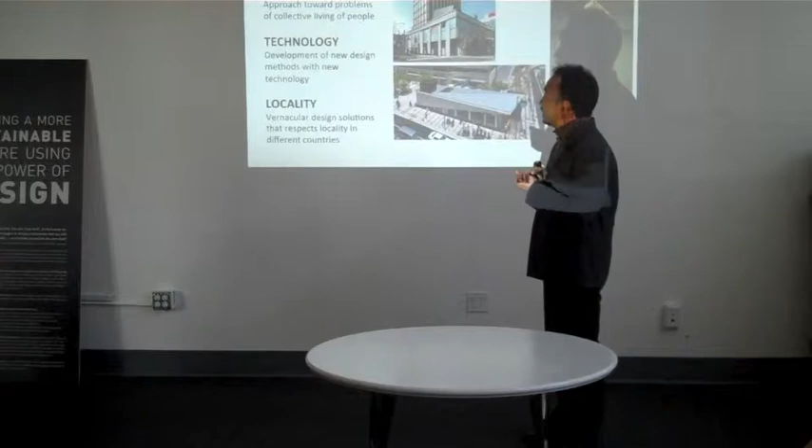So just start. We, KMDW, actually today is the 10th anniversary of KMDW. Happy birthday! Wow, 10 years, yes.

Then we get several projects from developers and private sectors or some public sectors, and some urban projects like this in Kobe. And here, a part of a redevelopment project in Tokyo, working with SOM New York. And here is a mountain house in Hakone, a private mountain house.

And this is our idea to use LVL and plywood to build a 14-story residential tower in Japan. To do so, we need some non-flammable wood technology. And we worked with some engineers to develop that technology. And then we got the 2-hour fire rated permission from the government. So basically, technically we can build this. But we are trying to find a sponsor at this moment.

Then this is the Tokyo Midtown project designed by SOM New York, which was completed in 2007. So we are representing SOM now in Tokyo, in Japan, and we are doing some other projects with them. Unfortunately, we started to work with SOM San Francisco here, but the project stopped. That's why we missed the chance. But we are still pursuing the chance, working with SOM in San Francisco. And some other projects are happening in Beijing, and this one is Tokyo, but a Hong Kong-based developer.

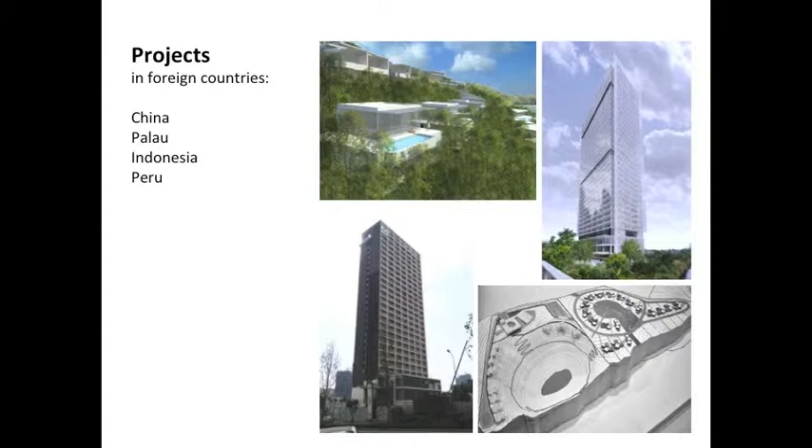So we try to collaborate with several companies or sectors or organizations internationally. That's our purpose. So we try to expand and also introduce many companies and people from all over the world. And these days we are involved in some projects in Peru. These are a hotel project and residential on the top of the hill. The altitude is 3,500 meters. How many feet? 10,000 feet, something like that. Yeah, it's very high. And then here in Jakarta, some office buildings and a Palau resort.

And it's fun, of course, to go to many different places all over the world. But at the same time, it is very difficult to understand their local culture. But that is a very important part. So we try to be involved in their own culture and then try to understand and interpret it in a sort of modern way to achieve this project.

So today, we just would like to show 4 specific projects, which are related to wood and also community and some issues of social programs. Because after this project, this one completed this year, we got the tsunami and Fukushima plants in 2011. So we started to think how to respond to those disasters.

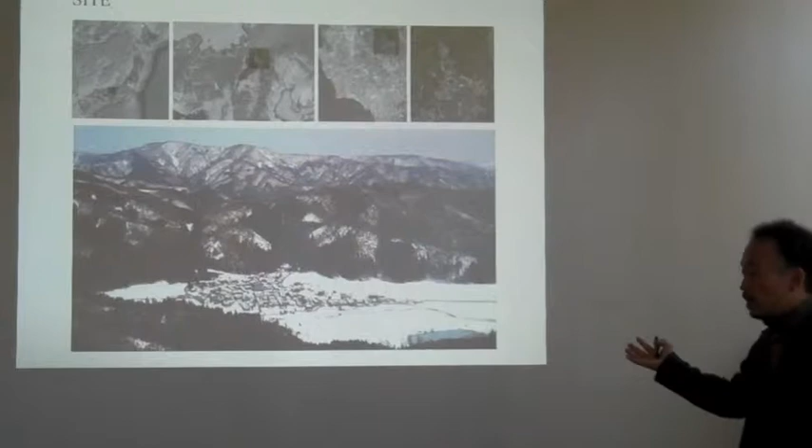So the problem is depopulation first, of course aging, and the younger people moved out from this area to Osaka or Tokyo. Then also a decline of local industry like farming and also forestry. And also another problem is a lot of damage by wild animals, like monkeys coming down from the mountains, and boar or deer or sometimes bear. It's very dangerous. They grow several crops and fruits and everything. Just one day before their harvest, monkeys come and then open the net. And they're very clever because they put a small monkey inside.

One day, so they know when is the best time. So it's very difficult. So what they are doing is there's a field here, covered by a sort of mesh net, and they're working inside. And outside, the monkey is sitting, and they're watching. So it's a totally different, opposite situation.

So I was very amazed, and I just want to use their sort of brain on how to improve this village. But that part is very difficult. I'm not a specialist of monkeys, so I would like to communicate with monkey specialists on how to collaborate.

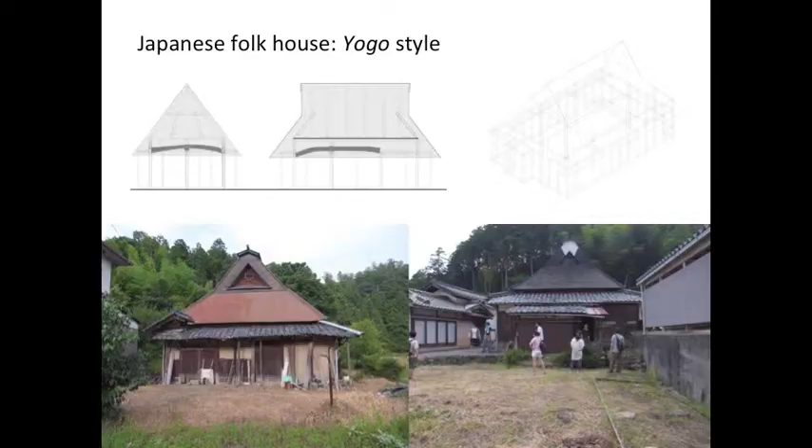Actually, this is the house which I was supposed to relocate. We started to do research on this house, and we got several ideas from it. So these are Yogo style, and it's beautiful. Originally, this is a thatched roof, but now it's covered. These are all in Japanese. Yesterday I just gave up translating into English.

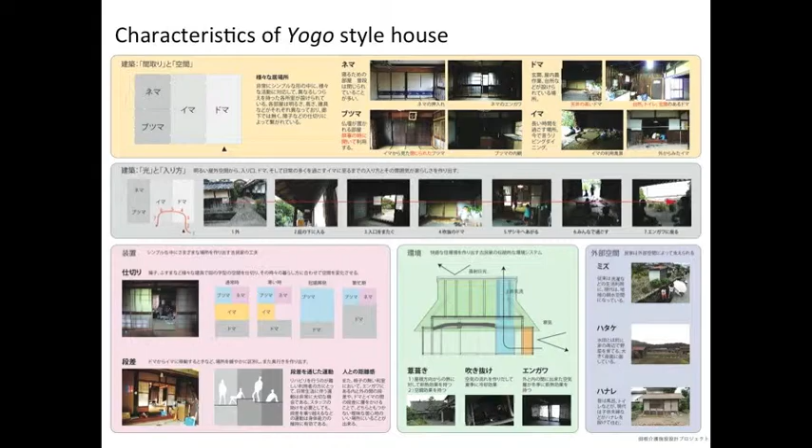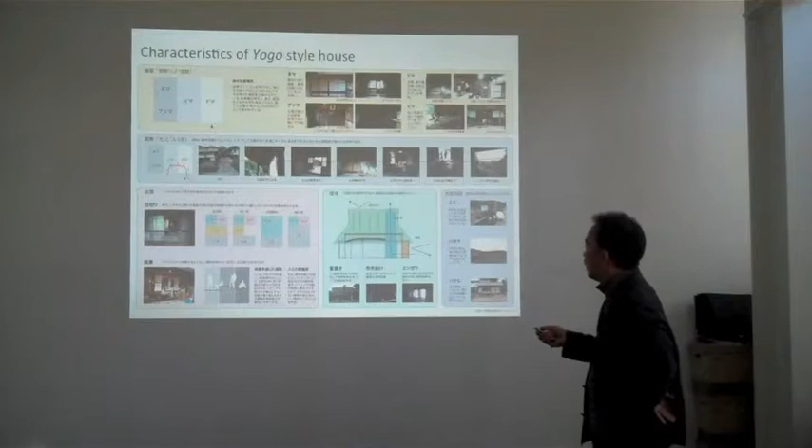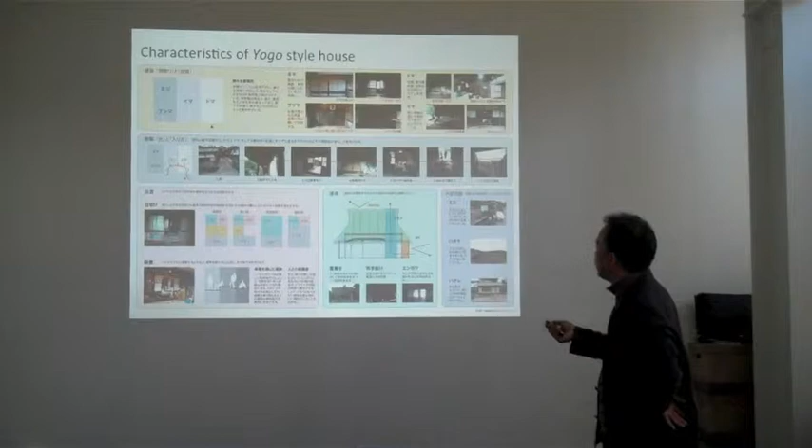But basically, you have 3 spaces in a house. This is the kitchen, most outside, and then the middle. And this is the bedroom, and also the place for a small shrine in the house, a small sort of temple to protect the ancestors' statue. And we also researched how people move in or use this house, and some environmental issues, sun, light, or wind. Then we learned how to use these ideas for the house.

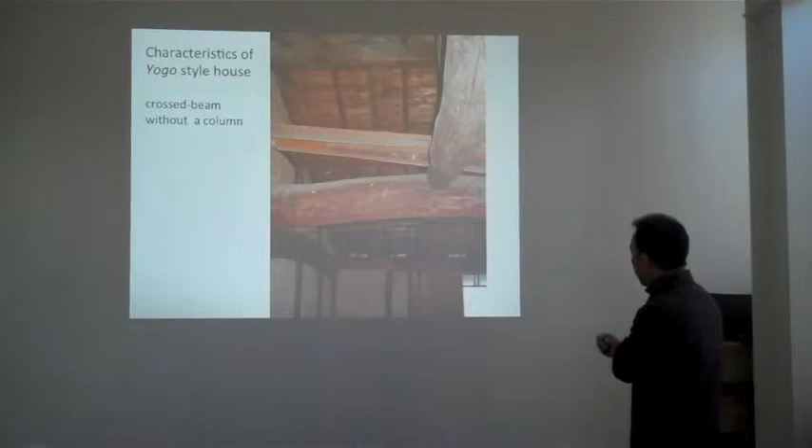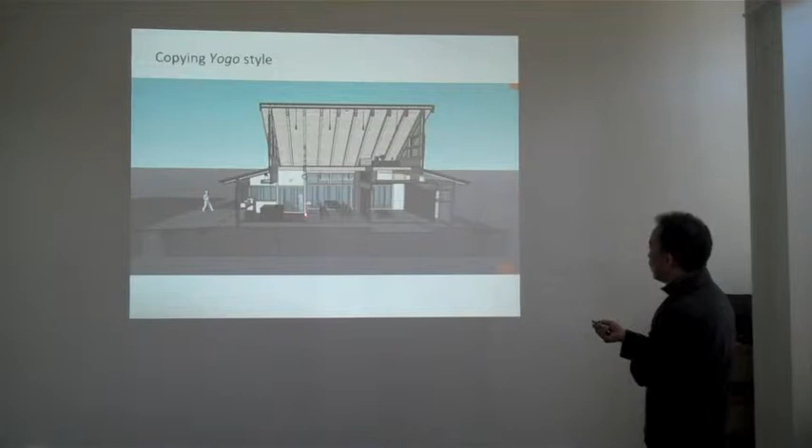Also, we entered the old house. This is a 100 years old house, and we found that these beams are very special in this house, without any column in the middle. Usually, we have a column. This is the heaviest part. So we started to make a scheme model, and here is the kitchen part, here the middle, and here's the deepest part. And the shape of the house is like this.

Then we communicated with the association of the senior people, and we found that we can go with this. So finally, we built this house here. It's much more simplified and modern compared with the existing house.

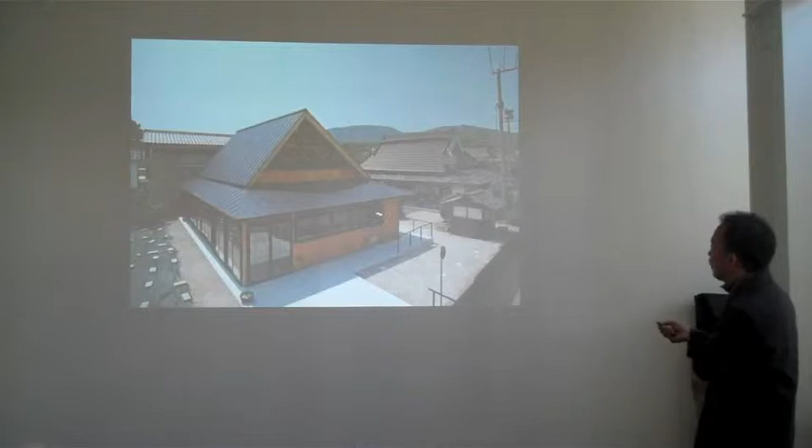Here's the one, and then again the middle. Basically, this seems like a roof, but it's a middle because it's covered on the top of the house roof. And here's the entrance, and here's the kitchen part. There's a garden in between.

Okay, and we use the natural wood, which is actually all just taken from this area, including these cedars and spruces. So we try to use local material as much as possible to revitalize their wood industry. So this type of project is of course for the organization, but at the same time for the people who are working in this area.

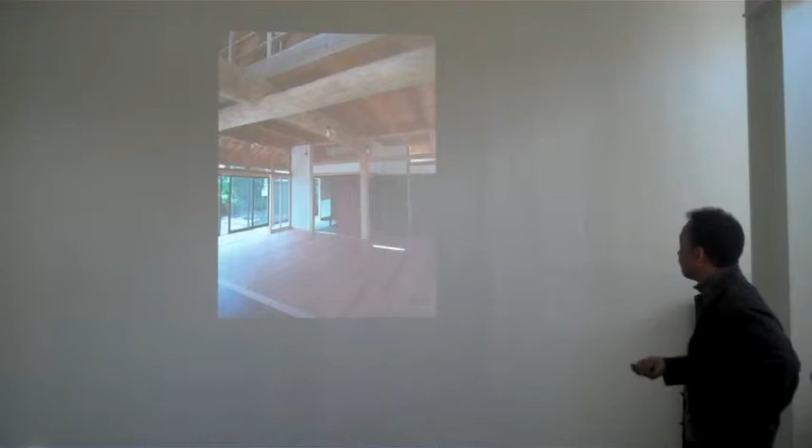So it seems very old, but everything is new. This is a cherry tree, and it's a cross beam. Like this. So people really feel a sort of nostalgia in this house. And then senior people, especially demented people, know how to behave here. So that's very nice. And we learn a lot from these people.

And after it was being used, we visited several times and did some interviews. And she is taking care of them. So it's a very difficult job, but at the same time it's worth doing. And the idea is, she's not so young, right? And they're living in this area. That means relatively younger, I should say younger seniors, take care of older seniors. So like 60s take care of 80s. And then gradually, getting older and older. So that kind of system we apply.

At the same time, here is an entrance, and we wanted to have a very traditional dirt floor. So it's a traditional way. I've never applied that kind of material to a regular house. But then we did a kids workshop to make the dirt floor here. Because the number of local kids is getting smaller and smaller. But they came here and did this one, and they enjoyed it very much.

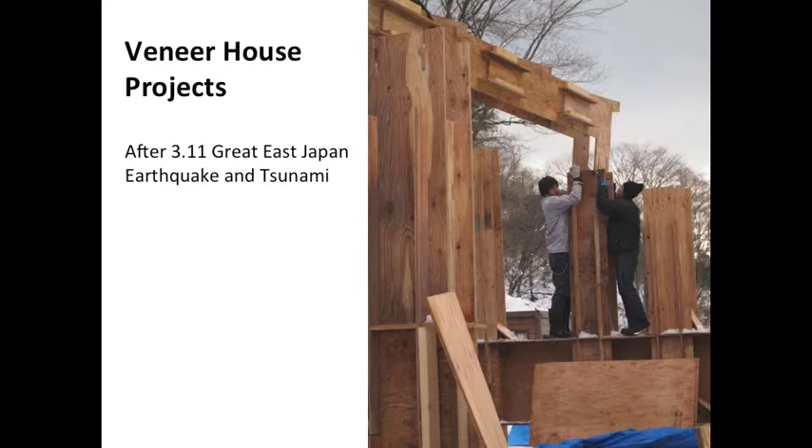At the same time, we have a workshop here with MIT, Massachusetts Institute of Technology students, every year. They come here every summer. So we try to mingle the students and local people, kids, seniors and everybody every year. So this is the first project, and we finished that in 2010. But then after that, we encountered this big event, 3/11. As you know, it's a big thing.

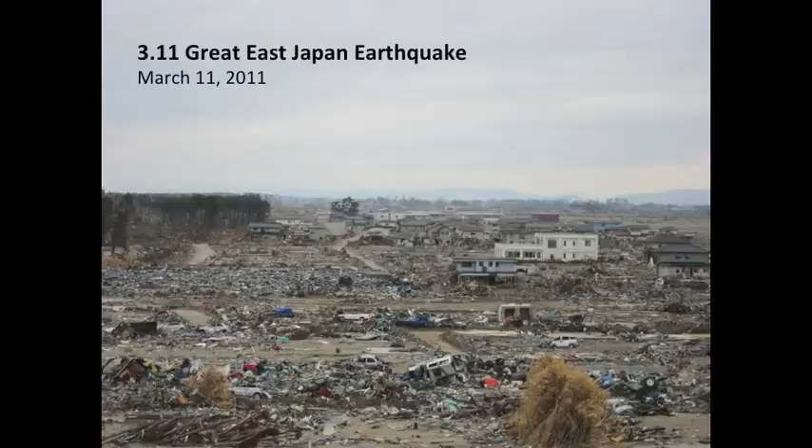This is the waterfront area, the seashore area of Sendai City, and here is the ocean, and the tsunami came this way, and it's devastating. This is 2 months later. That means May of 2011. I went here, and still 2 months later this situation. Now all the debris is cleaned up, so a huge space is open. But nothing else. It's a big thing.

I was in Tokyo in a big conference room having a conference. And after the earthquake, I went out and people were walking on the streets everywhere in the city. It was the first time for me to see so many people walking on the streets. And cars all stopped. The buses all stopped. The buses were full of people, but couldn't move. So if we really have a big earthquake in Tokyo, panic will happen. That is another big issue. So we are very concerned about it.

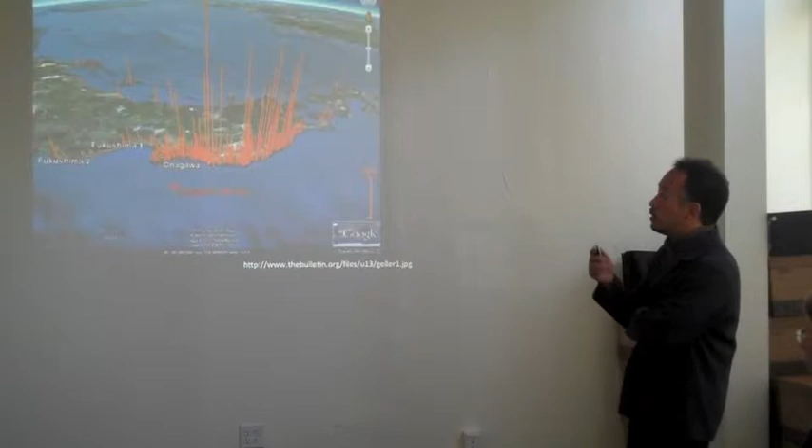The government started to use a consulting firm and civil engineering to settle things down, but there was a lack of communication with the local people, so we still have many problems. What we do is more like a grassroots activity, more like people need something for tomorrow.

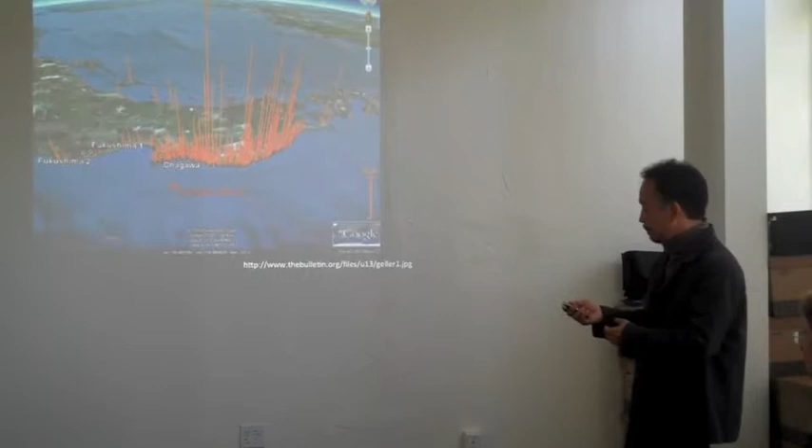So we started to think about what we could provide for them. What we did first at school is a sort of design-build methodology. Ishinomaki is a city where there are many engineered wood manufacturing companies, because Miyagi is the prefecture where a lot of wood can be provided for those industries.

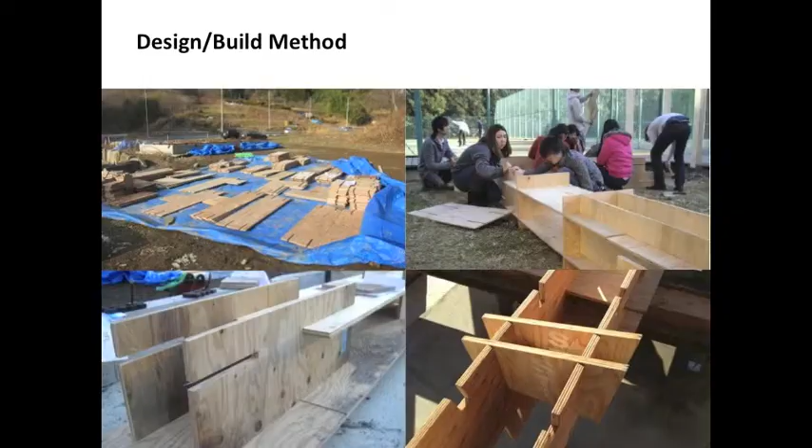Unfortunately, those companies are located near the port, because they import wood from Southeast Asia and export plywood to all over the world. I visited the factory two months before the earthquake, and then it was all devastated. But fortunately we could get some plywood from that company. These are all damaged - that's why you see the dark part - all damaged plywood. So it was actually very cheap, a good price we could get.

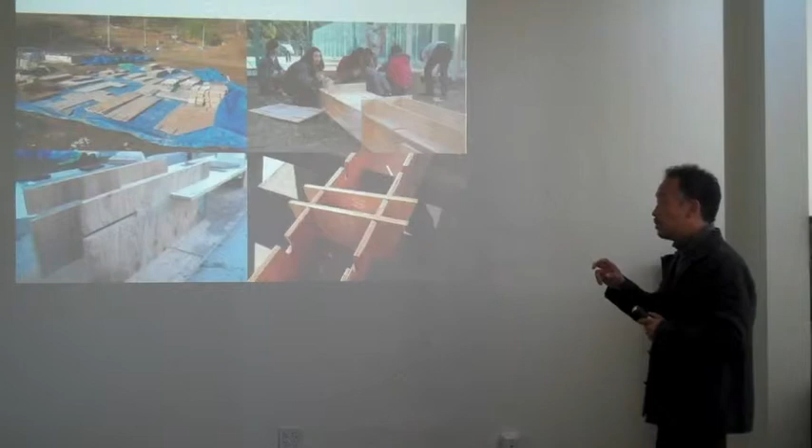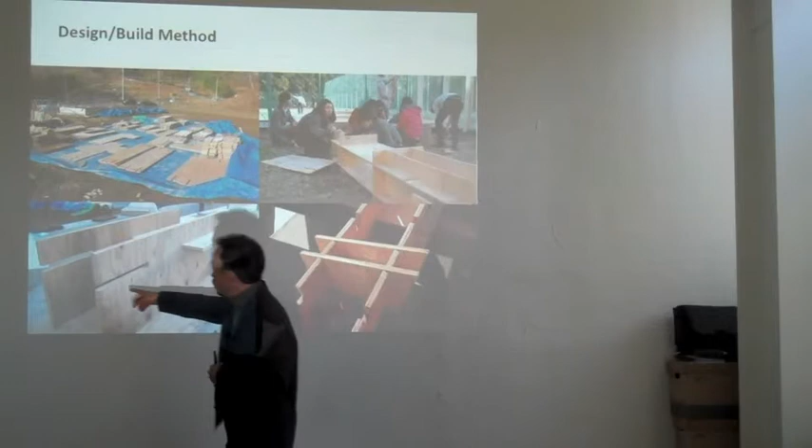We thought about how to use plywood to revitalize their industry, that's one thing. And also, if we could assemble a house in a very fast way, it must be very helpful for people who need a house or community space in this area. So we used a technology to make a notch, then insert and assemble to make a house, and the students did this.

This is 18 millimeter, about 5/8 inch thick plywood. In Japan, the most popular size is 3 feet by 6 feet - here maybe 4 by 8. So we used the most popular sort of board, and made a mock-up at school first.

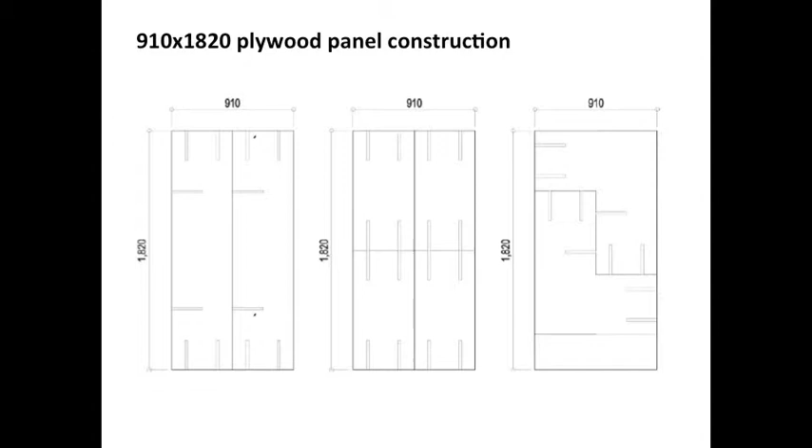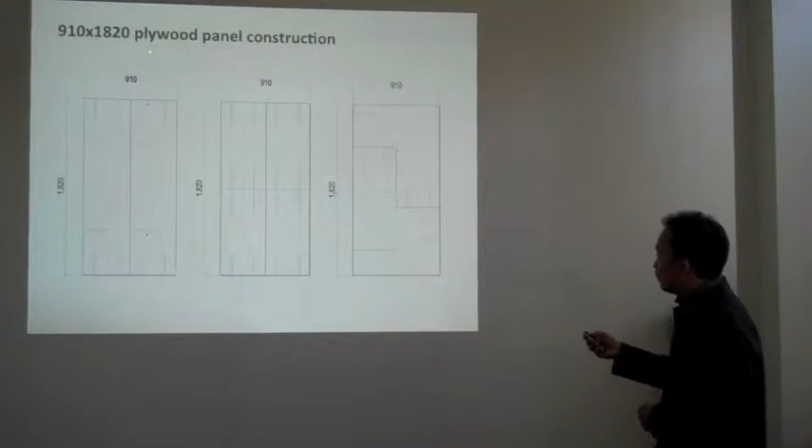Then we tried to cut it so we didn't make any waste from this board. We tried to divide it into 2 or into 4, so the module is maybe 400 or 500 or something.

The idea is to assemble but also disassemble, using the same material in different places. Eventually we would like to reduce the number of panel kinds until some single number, like 7 or 8 kinds. If so, we can really apply it in many ways, and many kinds of houses can be built with those panels.

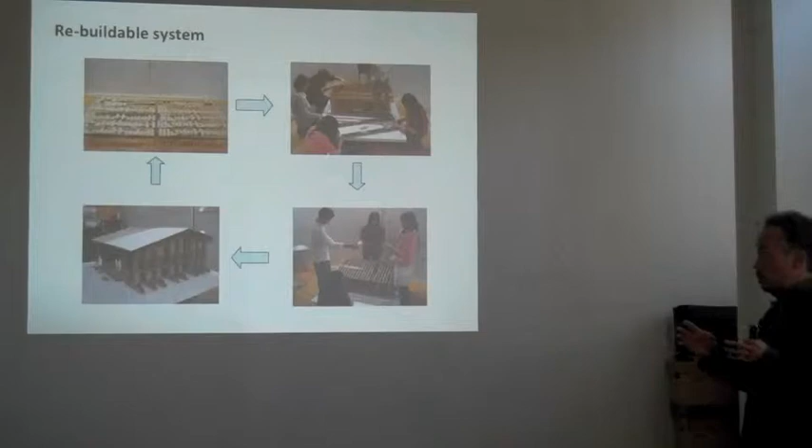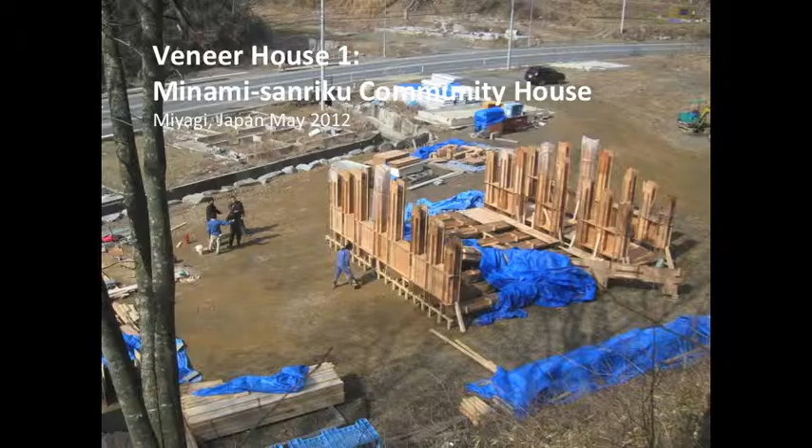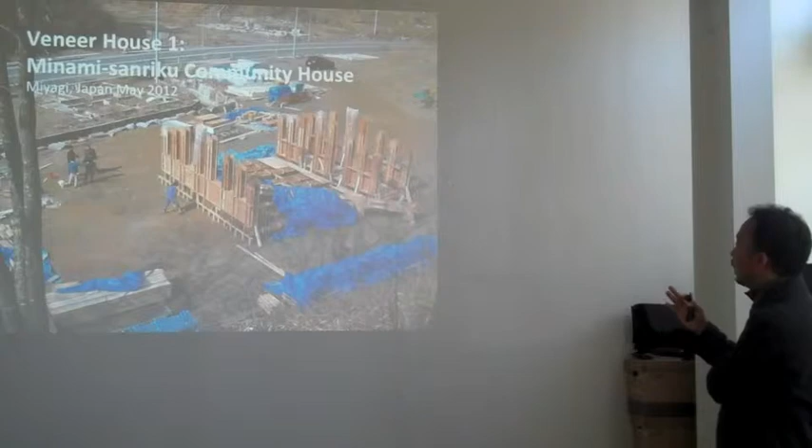So this is the first Veneer House, in Minami-sanriku, north of Ishinomaki. This area was all devastated - that's why you can see the concrete base here. Then one guy tried to make a community house first. I communicated with him, and we decided to make one house using the local plywood.

The same way - make a notch - but this time, unfortunately, we couldn't get the computer-controlled CNC router. That's why the local manufacturer cut by hand, like 300 or 400 notches. So it was very tough, and also not accurate, so sometimes very difficult to construct the building.

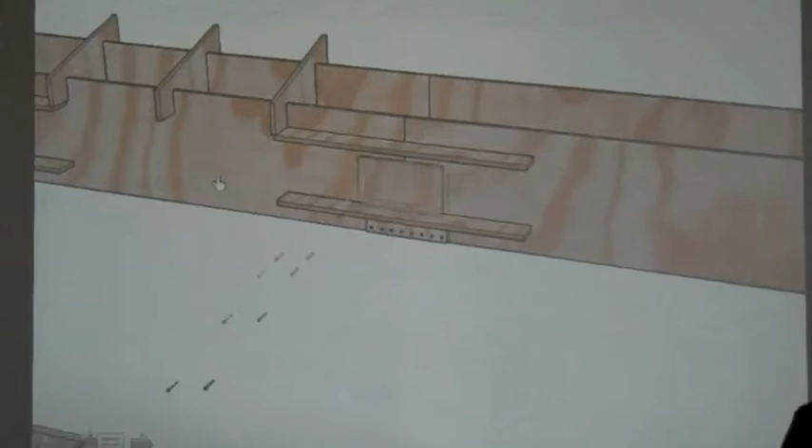I'd like to show some of the process of how to assemble. This one is an upper beam, and the joint is like this, very simple. This one is 6 feet, 6 feet, 6 feet, 6 feet - so total, the longest span is 7.2 meters, 24 feet.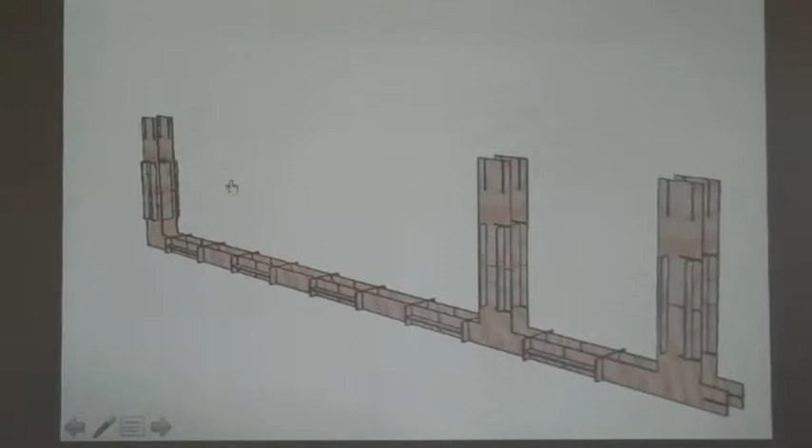This is the lower beam, and the joint basically uses screws, because it's easy to disassemble - so we didn't use any glue. Then we put the pine base, and put these sort of frames, like 8 frames or 7 frames, then insert and try to fix it.

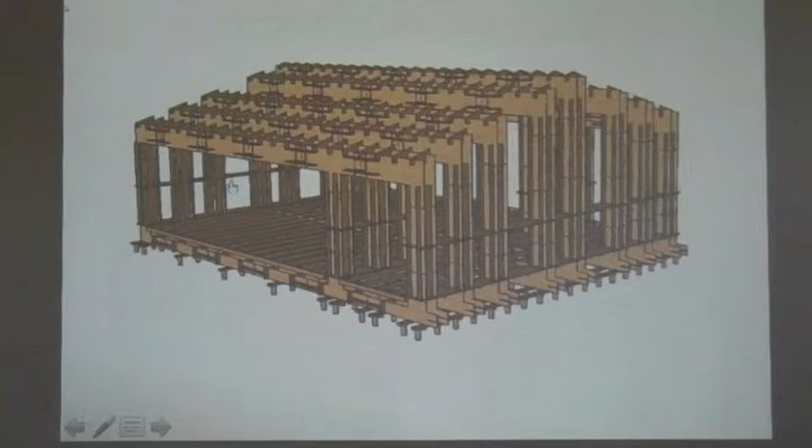The difficult part is, for example, this long linear material. We wanted to use LVL, laminated veneer lumber, which is also veneer, but at that time we couldn't find it. That's why we used this one - it's a 2x4 material, which I think was important.

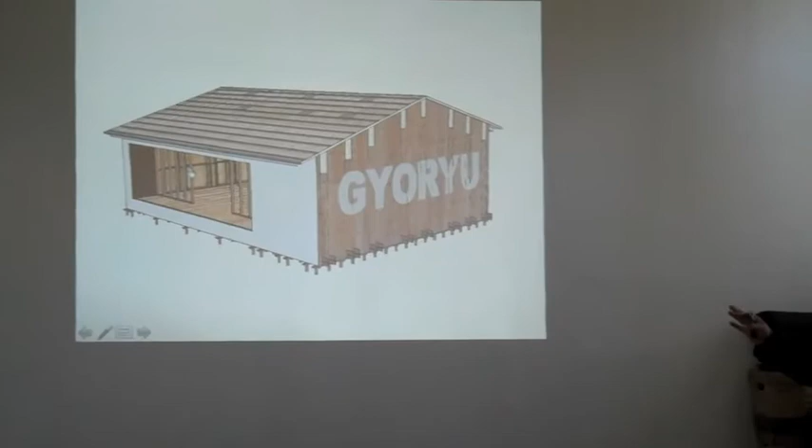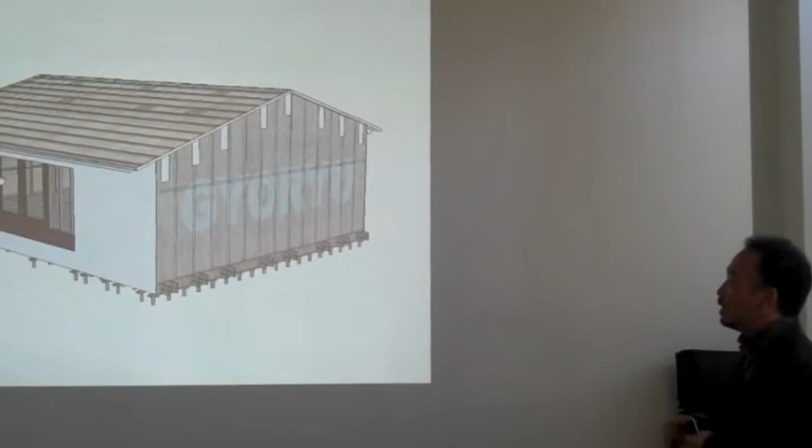The thing is, we could finish the framework in a very short period, something like 3 weeks. But after that, we had to put exterior walls, roof, and interior insulation, and it took like 3 months after that. So even with a sophisticated way of constructing the frame, the finish is actually what takes time - I found that was the difficult part.

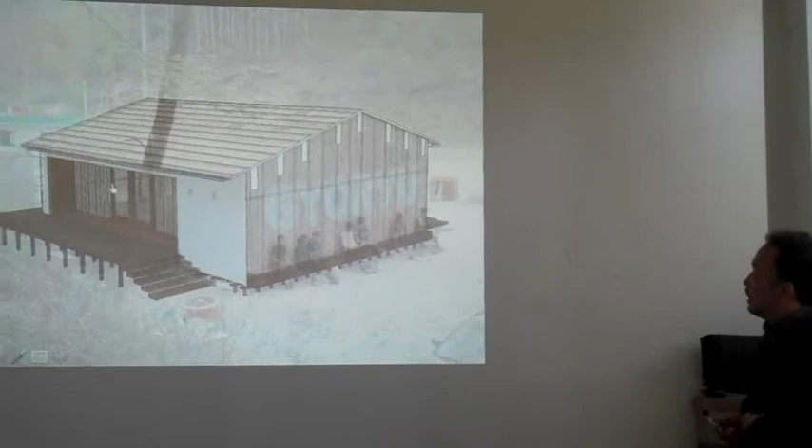So this is the final day - they're very happy and also very tired. I took students from Tokyo, so it cost a lot of money to let them go. The first one to two months they were very happy - wow, this is a real project. The latter half, they still went, but go or come, that was the most difficult part.

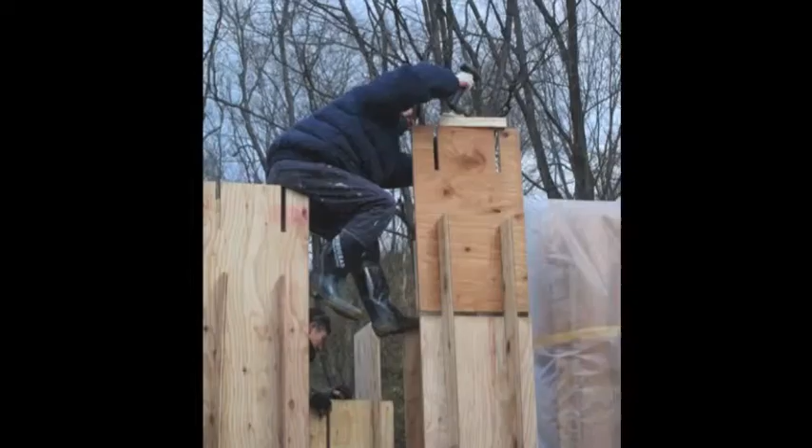That's why usually there's only a gap - it's easy if we just cut by router, very accurate, but in this case it was not so accurate, so he had to adjust it by hand.

And the timing was very bad. Starting from January, ending at the end of April. So it's snowing and very cold. We worked from 8 to 5 in the evening while the sun is still up, so it was very cold. But inside it's so sunny. And they work very hard.

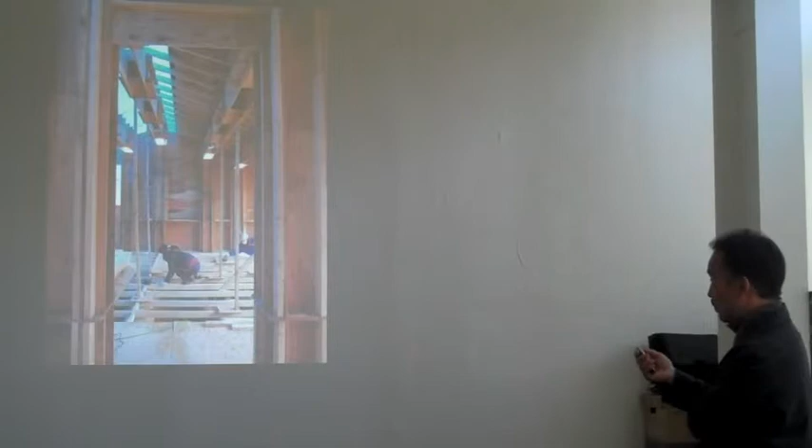Sometimes very dangerous. I did the safest part. I know, basically.

Gradually, it got very close to completion, and we found that the edge is just 8 feet. So we put some horizontal element to make a shelf, which also works as a structural element, and got some lights inside. Then finally we finished this one at the beginning of May 2012 last year, and we put some cloth to make a roof and ceiling, and then put the light inside. And also the skylight is just above, so the light also comes in during the daytime.

Exhausted—one of my students. But we are so happy because the students are really happy first. And usually it's very difficult to experience this type of construction at school. So we did this not only for local people, but also for the students.

Gyoryu is the name of this place. Originally there was a bath house here, called Gyoryu, run by a certain person. So after this completion, we had a plan to build a public bath house, but because of lack of money, we stopped. Now they're using this space as shelves.

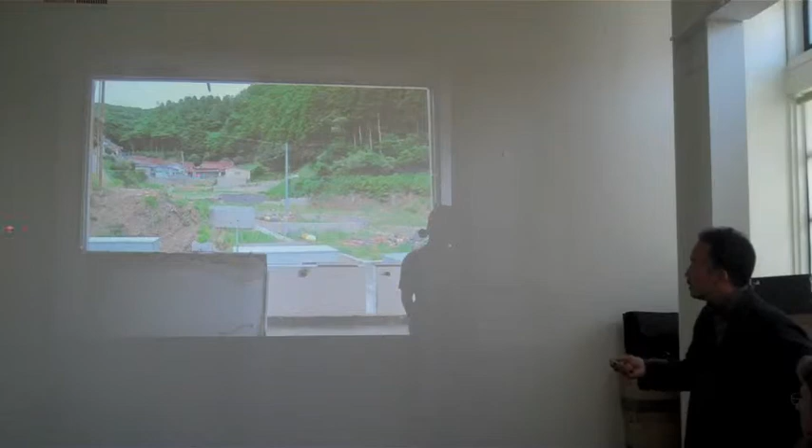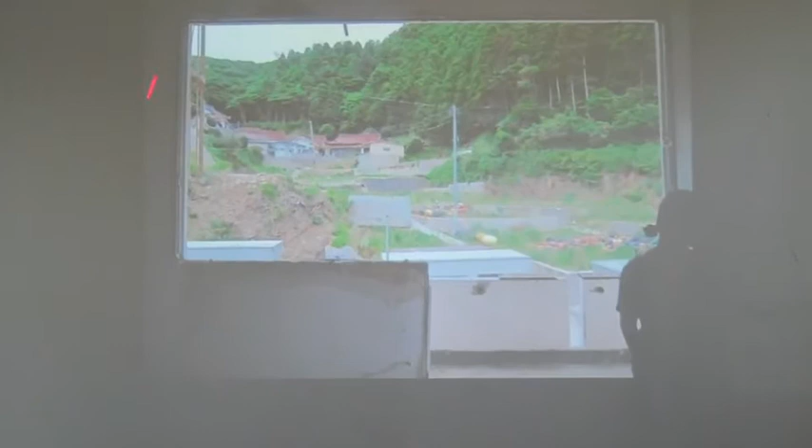This is a 1,000 square foot community house, basically for the community of fishermen, because this village was a fisherman's village. Originally 23 families lived there, and more than 80% of the houses were lost. This place is the second floor of the community building, which was made of concrete, but you can see it's all just a frame—only the frame. All the sashes and everything else are gone. So they decided not to use this building, and they needed one community house for themselves.

So we first came here last year, maybe in the fall, then came back in summer and started figuring out how to apply the plywood. This time we learned a lot.

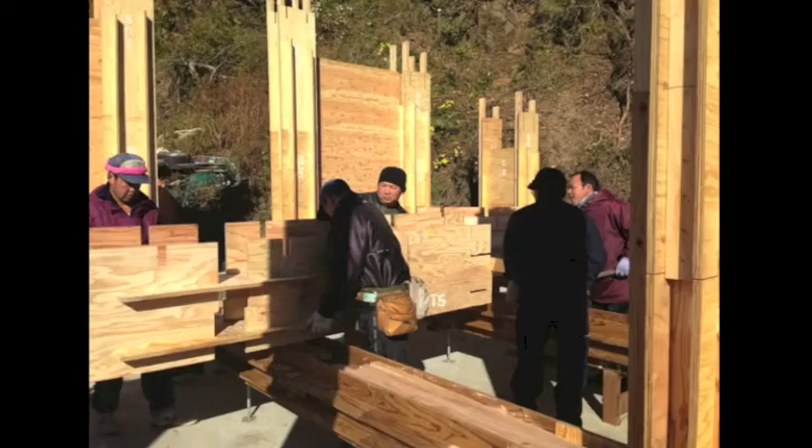We learned a lot from the previous project—we didn't even have time to make a drawing before we had to construct the building. So this time we decided we should take some time to make the construction period shorter. Otherwise we'd just go back and forth and it would take a long time.

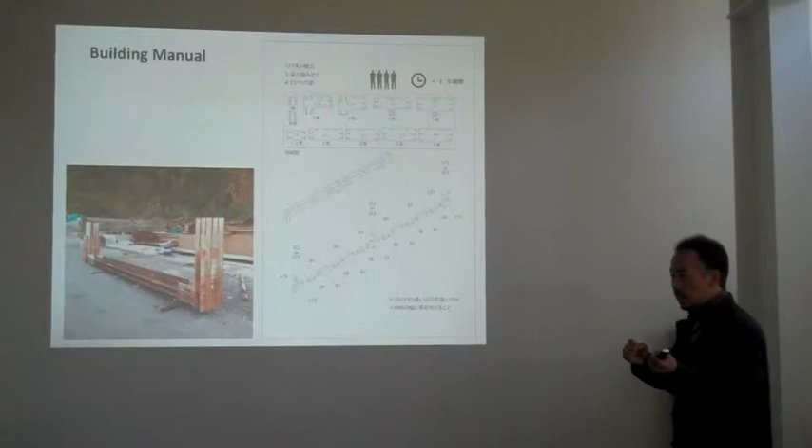So this time, these are actually fishermen—not students, though some students joined—mainly local fishermen acted as the contractor. We made a manual like this, so that even without any instructor, for example 4 people could work about 1.5 hours total. These are the elements, you collect them from the stockyard and assemble them. This way, nobody has to instruct how to make it—they can just make it themselves. So this is how we improved compared to the last project.

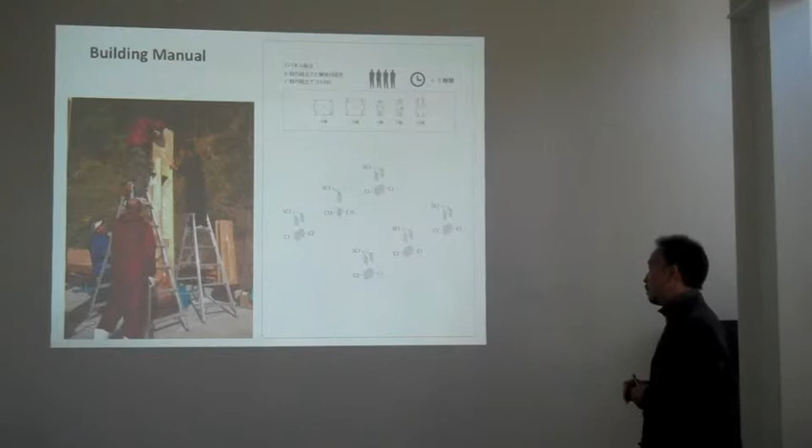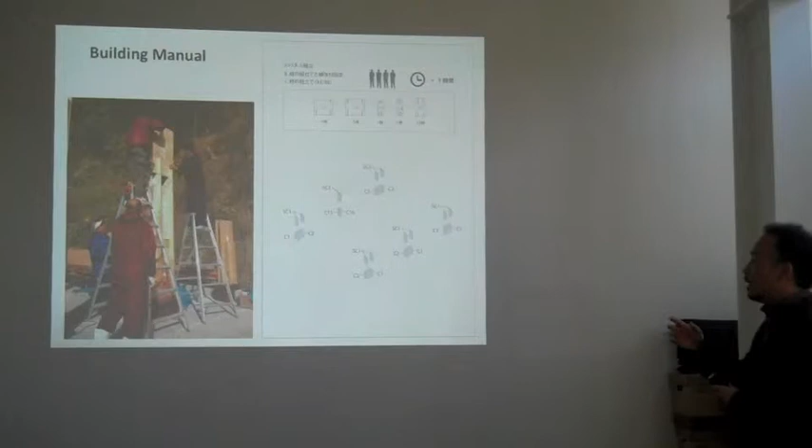And these are all fishermen, basically, but of course we sent one guy to supervise the site. He was the youngest guy on this project, but he was very reliable and very helpful for us and for them too. We also used Facebook this time to gather people. So what improved compared to the last one was that we used communication tools, like a manual and like Facebook.

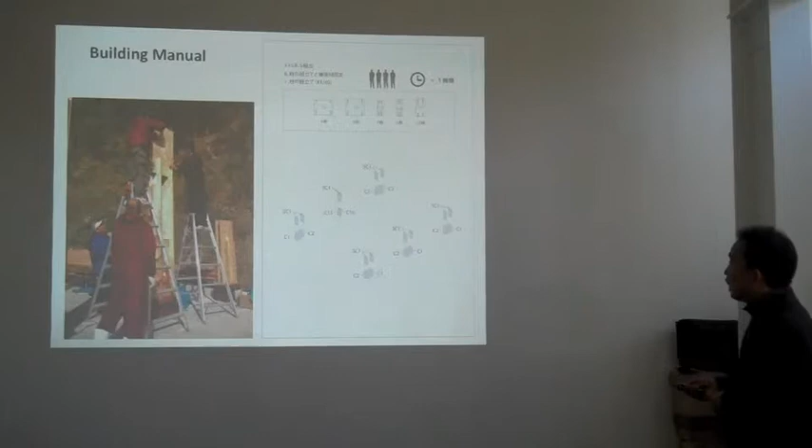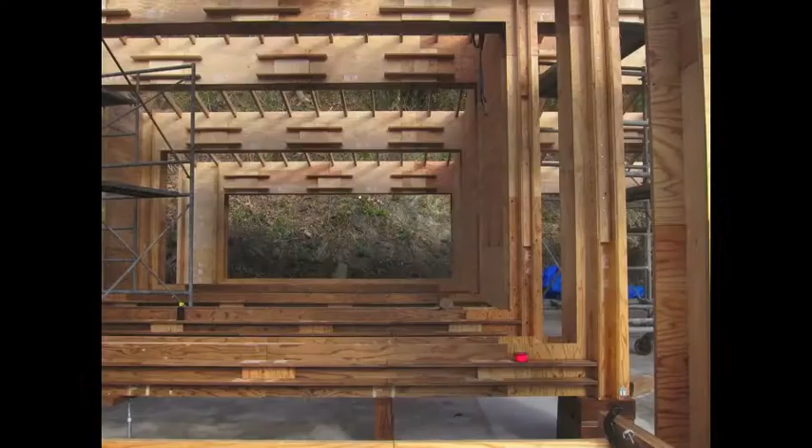Then a month later, something like this completion, and it's all the same system for the columns. And then these beams, it's called rafter. These are all LVL this time, not 2x4. So LVL also made it big.

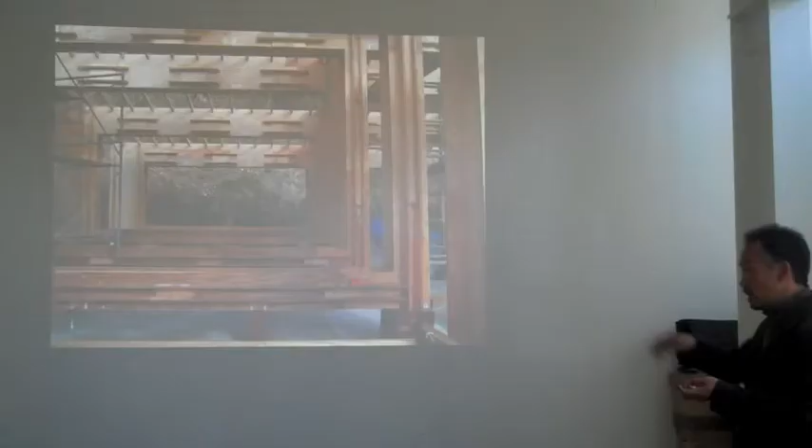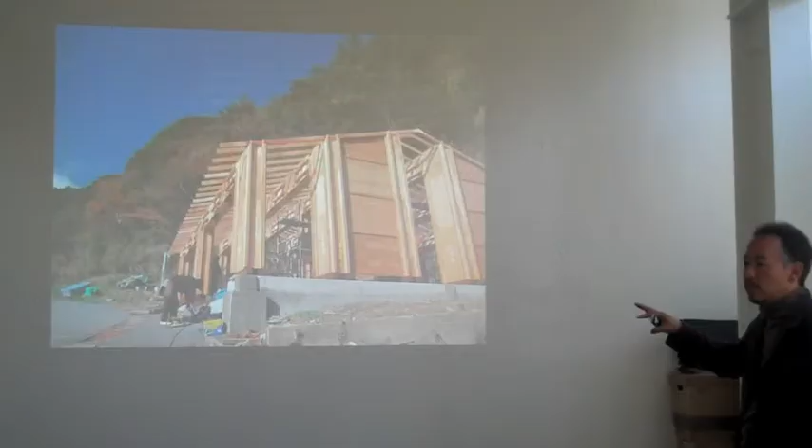So this building is completely, the wood part is completely made by veneer sheets. And it's a beautiful time because we can see all the structure part. Any kind of building, if you see the structure, it is very beautiful. So I just took many photos.

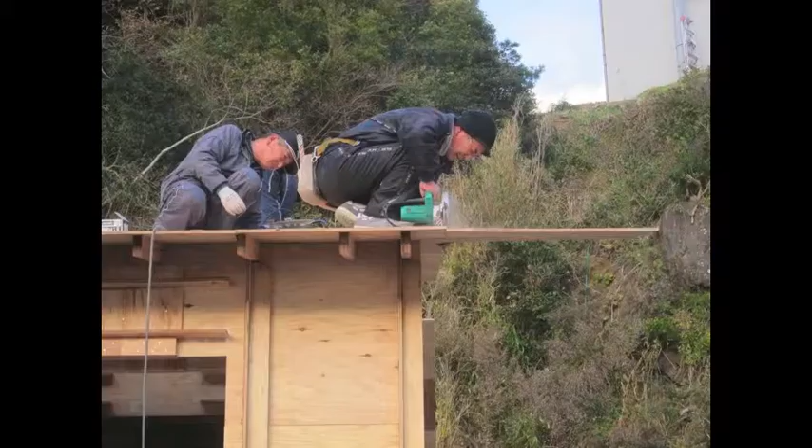And a fisherman is on the top of the roof. I was really afraid that if they fall, it's very dangerous. But they actually had no problem on the top of the roof, even though it's slanted, because on the top of the ship, the boats, moving around, it's really brilliant. They didn't fall, so no problem.

He's actually in his late 60s, but he's the guy who really does it. It's amazing, I couldn't go up to the top of that. I'm always the safest one.

Did you just say that the rafters are plywood? Yeah, it's LVL, laminated veneer lumber. It's just like usual plywood, laminated this way. But LVL is on the same direction. If so, you can make a longer element. Eventually, the regular size is like 6 meters, 18 feet, but you can make it longer. So this one is something less than 6 meters, but basically it's also the same material, like plywood.

But at the same time, this is a bit difficult for us to get, other than in this area. That means in Japan, the plywood manufacturer produced this one, but not in other countries. So they just produce regular plywood. So the issue we actually got on this project is that LVL is not so popular other than in Japan or the United States. So the next project, we did it differently.

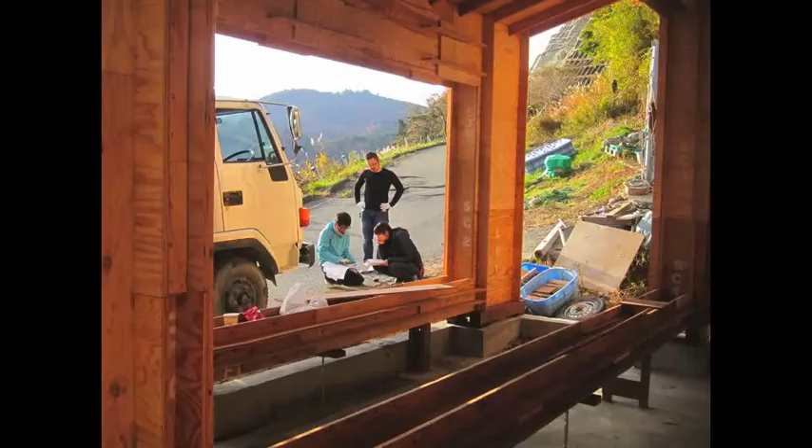And then our staff started to think, okay, next one, how to draw this. So trying to catch up, because the construction is very fast. And then they just made a manual, so they really had to have it. Then finished - that's one, February 24th. We put the polycarbonated corrugated material outside.

The roof is metal. And at the timing, Mr. Yoshikawa, who is a member of AFH, is collecting garbage, the last bit. Very nice. Wonderful.

And then on the final day - okay, this house is composed of two sections. One is storage, this part is storage. And the other one is a community space. So then finally we clean up and then we start.

Take a photo - maybe you can see this guy, right? This guy is Ultraman. Do you know Ultraman? Nobody? Ultraman, thank you very much. Ultraman is a very popular TV character in Japan, and there are many series - maybe more than 10 or 12 series. The first one is Ultraman, the second one is Ultraseven, Ultraman Taro, Ultraman something. This guy is called Return of Ultraman.

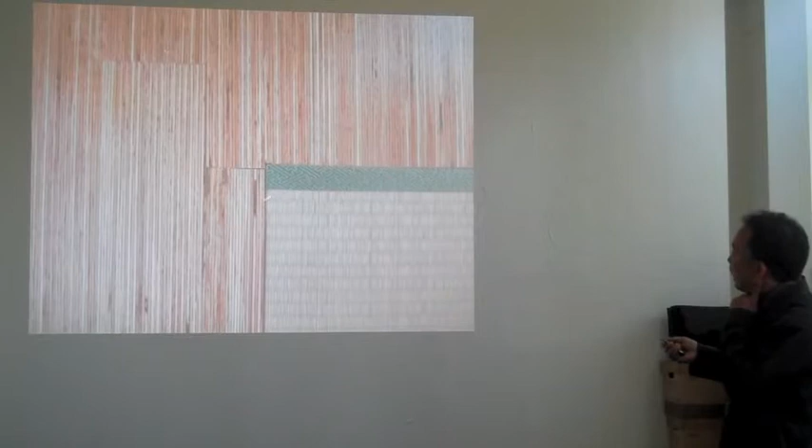So here's the material - this is tatami. And this is like a 3 millimeter thick veneer that is accumulated and then sliced, so it's really a sort of beautiful wood finish. And then I would like to introduce the way of using this.

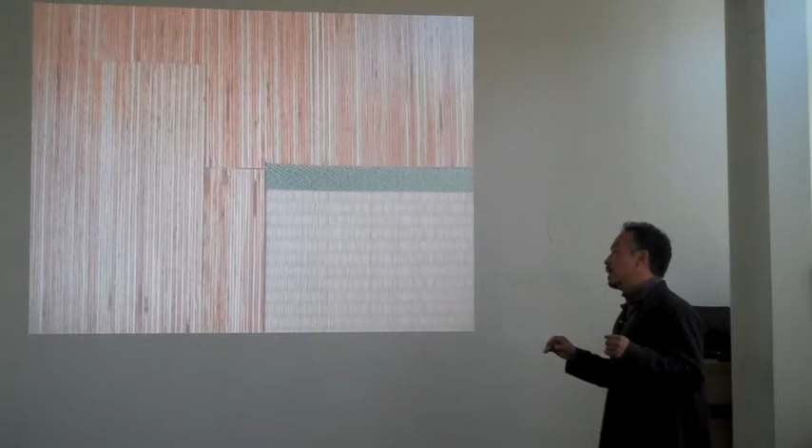Because usually plywood is a cheap material. And then we can see that plywood, okay, it's cheap, right? But this way, it looks very gorgeous. So I like this.

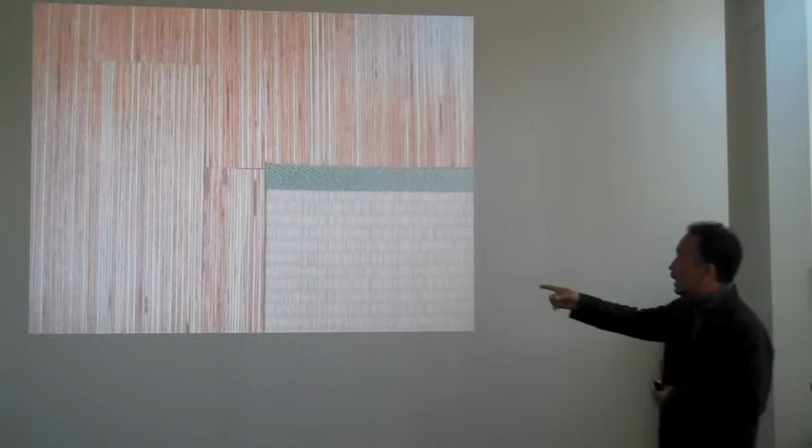Is that also the structure of the floor? How deep? Oh, yeah, this one actually is 40 millimeter. It's less than 2 inches. Yeah, but it's very thick. So insulation-wise, we don't have to have any insulation under the floor. Tatami also has some thickness, so it has some function of insulation. So we didn't put any insulation under the floor.

And some detail. The door also, we use a 4x8 plywood, cut it into 3 boards, layered, and in the middle we put the polycarbonate corrugated. And in the middle of the 2 corrugated panels, we put the air bubble wrap, usually used to cover something, but it works well. So some detail. Even the sleepers, we use sleepers.

And it's happiest moments. Everybody feels something. That's right. Yeah, it was here. It's amazing, right? Exactly that time, we did it. It was here. We maybe drank too much. Yes. Not as much as your photographer.

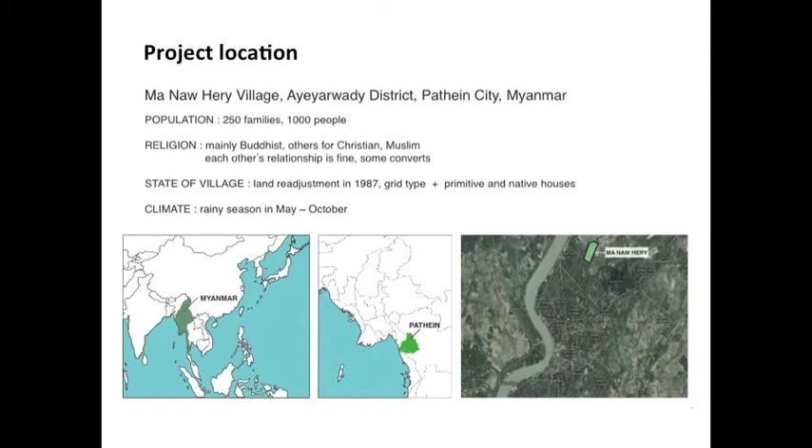Alright, so the last project is Veneer House 3, which was happening in Myanmar. Pathein is 5 hours away from Yangon, the biggest city. There's no train, so we drove down to this place. Ma Naw Hery village is a village where around 1,000 people live, located west of Myanmar, and it's a very wet area. It's beautiful, but it's a rainy season like 3 months of the year, it's all wet. So the sanitary condition was very bad.

It's still very bad. And this is a normal house, not just a wood house, but a banana leaf finish. And it lasts only 3 years. So we did some workshops to find where people live and what kind of living conditions. And then we asked what kind of space you want.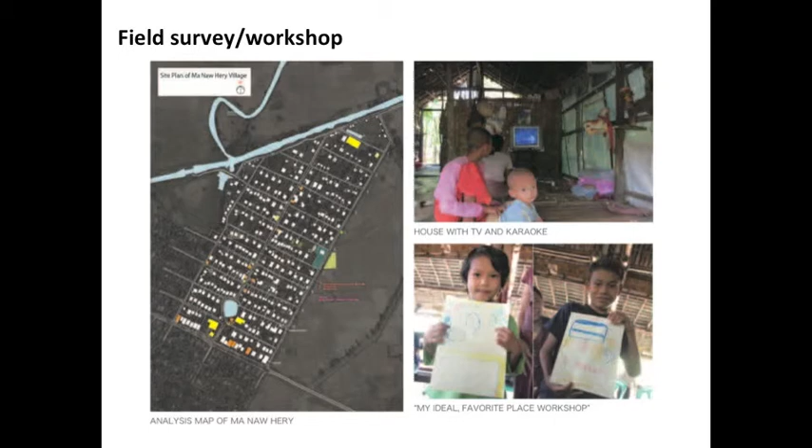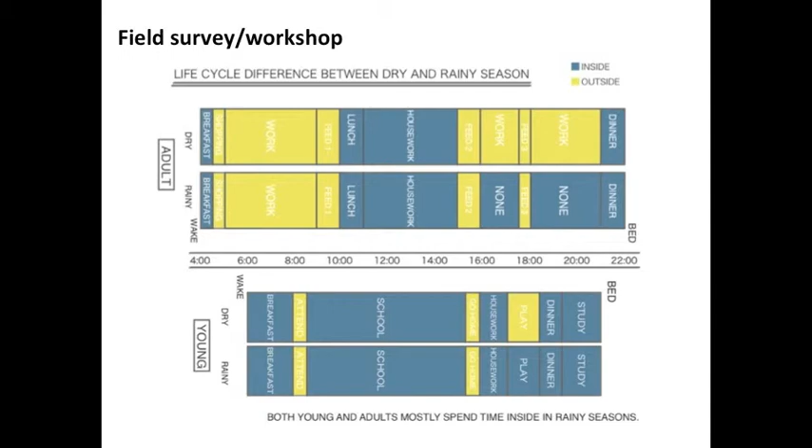We asked the kids, and we found that in the rainy season, unlike the dry season, they do not work in the afternoon, late afternoon. Usually they work daytime in the dry season. But the young ones are also at home. And the problem is, for those 3 months, kids and adults all live in the same place, and they are very stressed. So domestic violence, sometimes sexual harassment.

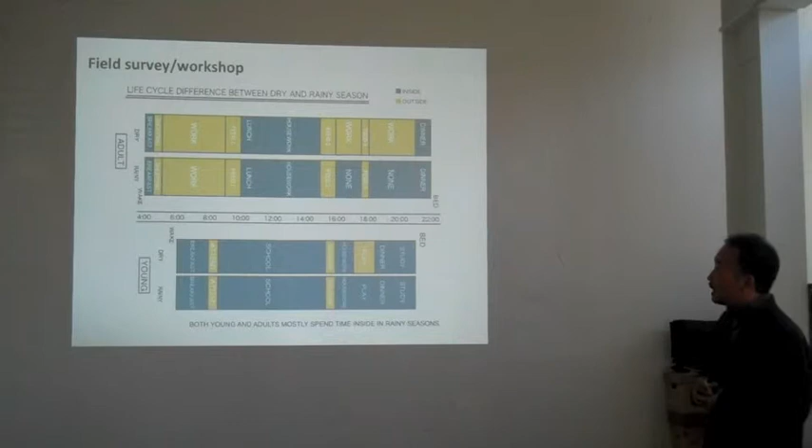So that was a very serious problem we found. And then YMCA helped us to propose to build a learning center for kids. If so, the kids can come every time, all year, and they're away from that kind of very dense situation. So we started to think what kind of house we should make.

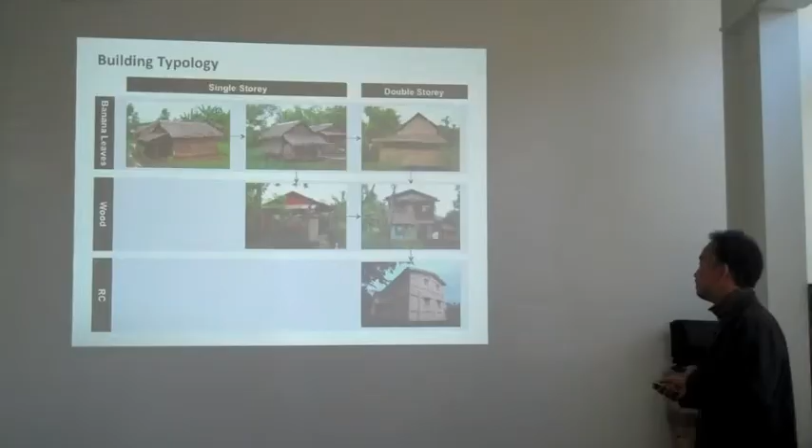This is a pretty good one because it's metal and then the wood wall. It's in very good condition still. So we just found what kind of material, what kind of lifestyle they have. A lot of kids really smiling. That is a sort of relief part. It's serious, but the kids are really... and we did some research about housing, typology and material.

Then building system. But this one is a wood house. It's a pretty good one. He's a carpenter. But the wood is very expensive first and difficult to handle because it's very heavy and hard. It's a wood from the South area, like ironwood or ipe or jarrah. It's a very hard wood, but it's expensive and very difficult to handle.

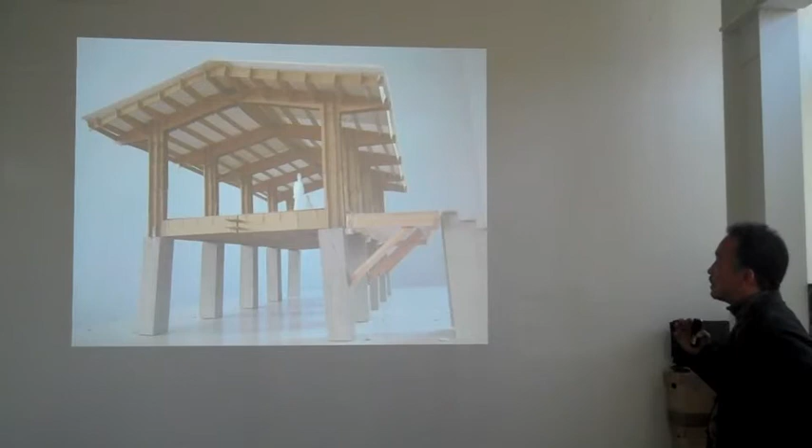And then we finally got the site. We tried to use the same system to assemble the frame first by using plywood, which we found we can get from Thailand. In Myanmar, they haven't manufactured plywood yet, but it's cheaper than the regular wood, so we could get this plywood from Thailand. We just bought the imported plywood in Yangon and asked my friend to cut it.

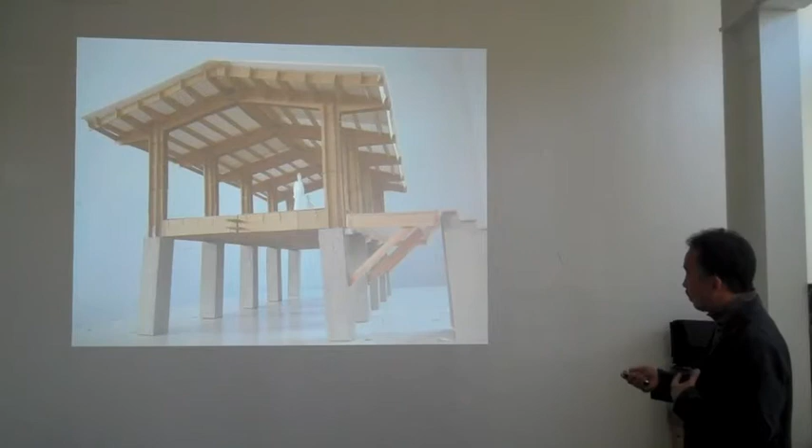And then we did a project workshop with kids. This is a 1 to 10 model. The kids started to just assemble, because I wanted to let them know how to insert and how to construct with the system. We thought that maybe they'd break some parts, right? But they didn't at all. It was amazing. Then finally we made everybody join together and make the 1 to 10 model. Then they knew how to build.

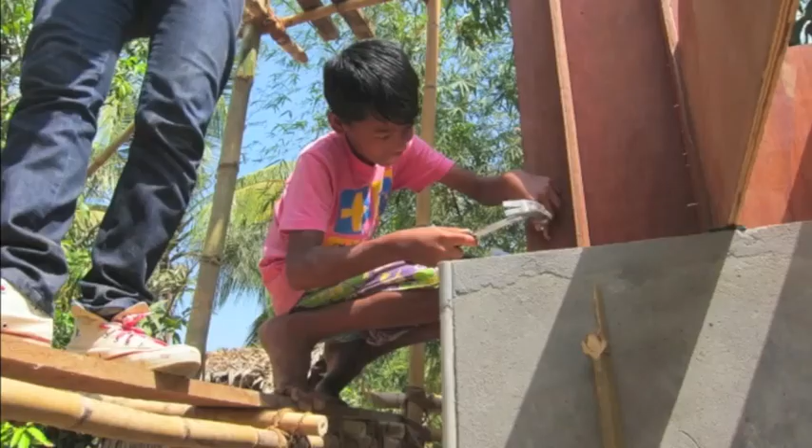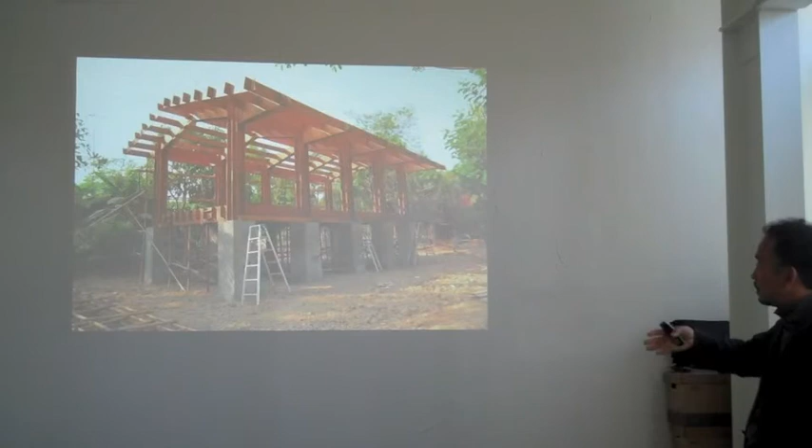Then from the next day we started construction and the kids really helped to assemble. Really helpful. He is 13 years old, he is 12 years old, and he hammered very well, actually better than I did. The base was constructed before we arrived. I came 3 times for this construction, and first ordered the local contractor to make the foundation. This is the brick frame and then wall concrete. So it took 2 weeks.

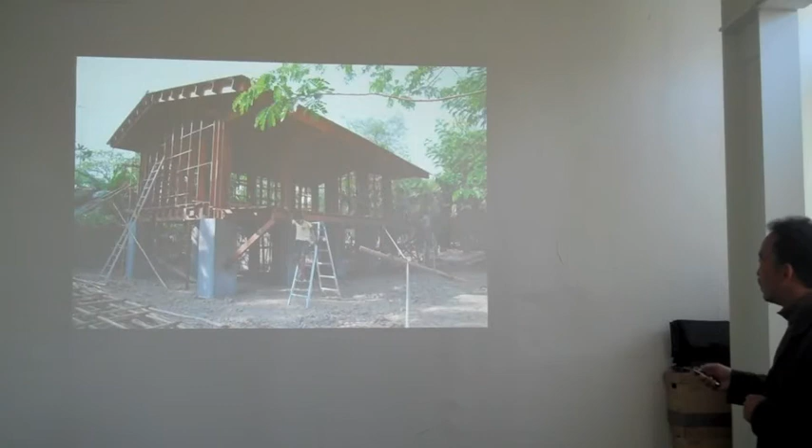After that, we finished this one in 1 week, so assembly was just 1 week. It's 500 square feet. And very happy. First week. Gradually we put the sub-frame here to put the exterior wall. And it's a learning center, so she started to study. It's wonderful. They already wanted to use this facility. But some of them did not work, and then we made a window with them and saw how it works.

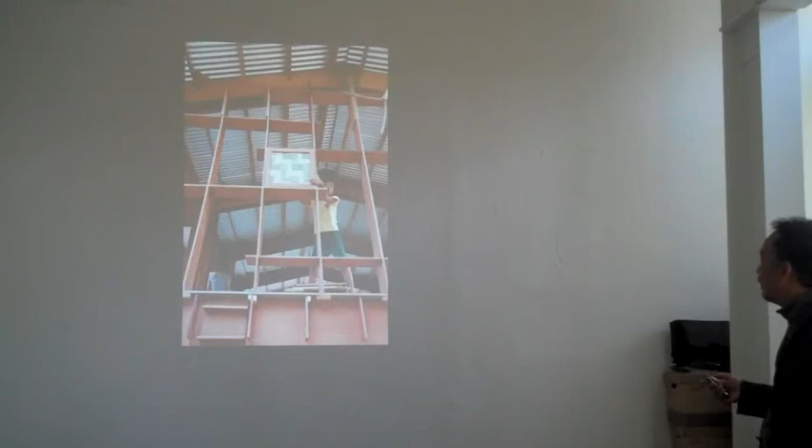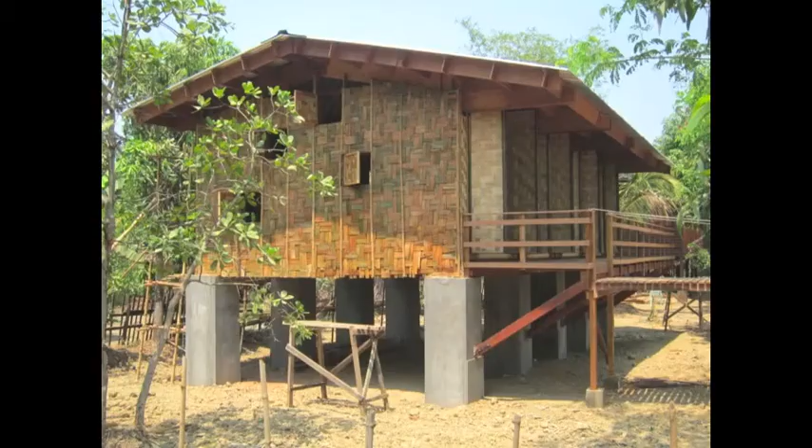Then finally we put the bamboo wall. It's actually very cheap, and it lasts more than 8 years. Construction. She just worked continuously, but fell down several times because of the heat. I found that woman master. Then finally it was completed March 24th, a month ago. We really enjoyed this construction. It took only 3 weeks this time, because the first week we constructed the frame, and the last 2 weeks were just to finish this part.

And there's no insulation. There's no double layer, single wall. So it's much simpler, and we found that this is much faster and it works well. This is the balcony. And the ceiling, there's a metal roof, so heat comes from the roof. It's very, very hot. That's why we put the ceiling with a gap so air goes through. That is our finish. This part is a window, but here is always open. The window, and you can see.

So the happiest moment again. 50 kids came from all over this village. Really nice to have these kids. They do not speak English at all, but they learned one word, teacher. Teacher is me. So I'm very touched. Teacher, teacher, that's it. So we took a final photo, and I didn't expect like 40 people just like that. It was a bit dangerous, but safely done. So now it's a bit better, right?